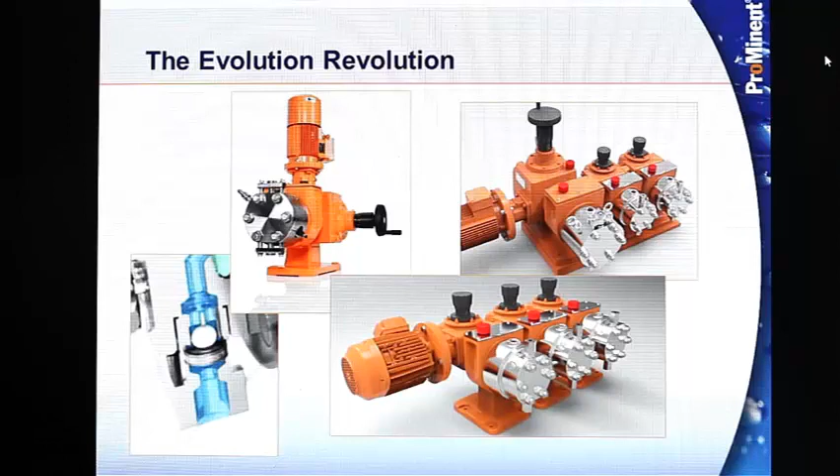So what is the Evolution Series pump? It's designed around the API 675 specification. API 675 is specific to chemical metering pumps, or positive displacement chemical dosing pumps. It is the American Petroleum Institute standard that everybody tends to build their pumps to, so it meets a high level of industrial standard.

It's one of those specifications that a lot of manufacturers will take some general basic exceptions to, but for the most part you've got a general guideline as to how you need to design that pump. We are compliant with the Evolution pump to the third edition, the most recent edition of API 675.

It is a hydraulically actuated diaphragm pump, meaning it has hydraulics driving the diaphragm, and consequently that pump can do extremely high pressures. It's capable of up to 5,800 psi, as you can see below. So it's capable of very high-end process type projects and applications.

It is a non-lost motion drive, which means it's a design that meets certain applications and standard specs for various clients, lending itself to the higher flow applications, becoming a very robust drive. These drives are not always the least expensive in the world. You won't find it in the very small pumps usually, but you'll see it in the higher end pumps where you need a much higher flow, much higher pressure applications.

The Evolution was designed to run in flow ranges starting at about 1 gallon an hour and up to 1,800 gallons an hour. It's able to do that through 4 frame sizes. Depending on the application, we can tailor in a single pump selection if we need to. Again, those pressures will go up to 5,800 psi in some of the lower flow applications for some of these services.

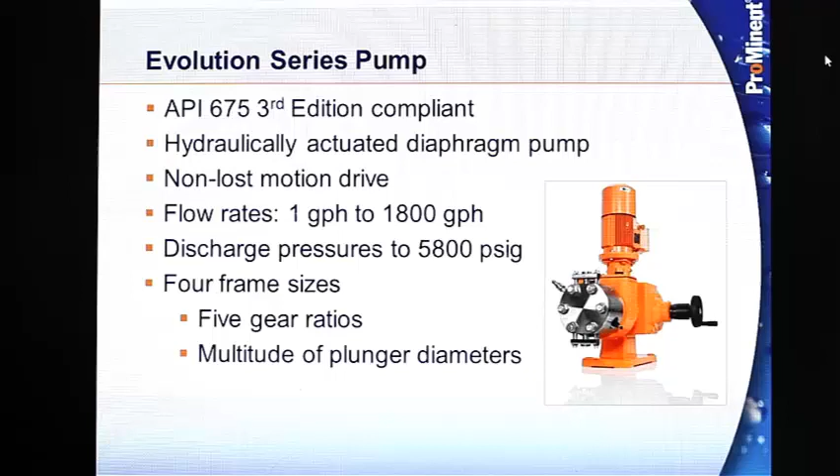The Evolution pump was designed to go after a broad spectrum of markets. Normally when we talk about API 675 pumps, American Petroleum Institute, we're thinking about chemical and petrochemical, hydrocarbon processing, the higher end process applications, which is exactly what this pump is designed for. What a lot of folks don't think about right off the top is other services this pump fits into, the power industry for example. The United States is currently replacing a lot of old coal-fired power plants, so there's a lot of new gas-fired plants being installed. Because of that, there's a lot of new applications, and those chemical feed applications can be relatively high pressure. So the Evolution fits into a lot of those services very well.

The oil and gas industry, even though it's not doing the best right now because of low oil prices, the business is still there. We know from past experience that the oil industry always has a cyclic effect. It will come back up at some point, and with this product you'll have a piece of equipment that fits it very well, including offshore applications for customers in the Gulf Coast, or anybody dealing with an engineering firm doing a project overseas for an offshore application.

The ones that don't always come to mind are water and wastewater treatment applications. Even municipal type plants periodically will specify a hydraulically actuated diaphragm pump. They don't usually need it for the pressure - most of those plants are 150 pounds discharge pressure at the most. But they have an engineer that has specified a product that says it needs to be a hydraulically actuated diaphragm pump. The Evolution fits those services very well. It's designed as a very robust pump, so it will be a very low maintenance product for them. Because it's designed for very high pressure applications, it's basically putting a very heavy duty pump into a very light duty service.

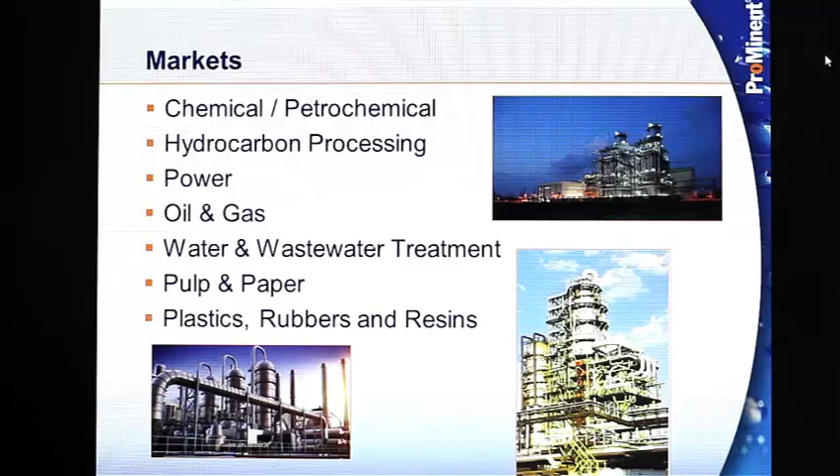Reviewing some of the design advantages that the Evolution has, high pressure is one of those things that comes to mind immediately. One of our bigger competitors, which probably has the largest population of chemical feed pumps in this range out in the world, tops out at about 3,500 pounds. So you've got immediately a product that can do higher pressure applications where they would have to step up into a much more expensive, much more complex drive mechanism to hit those high pressures. You're in a standard product, so you've got an ability to fit into those services much easier.

It uses the variable eccentric drive, a non-lost motion drive. It's a little more complex in the way it operates, but the net result is you get a very robust drive. These drives tend to run 15, 20 years without any maintenance other than changing oil. So they're very long life, very robust designs, and they'll give a very reliable product to most customers.

One of the features the Evolution has is it's always a double diaphragm with leak detection. That advantage sets you apart from some of the competition where they throw that in as an adder - that may be anywhere from $1,800 to $2,400 depending on the competition to put that into their pumps, where we have it as a standard option.

The leak detection option in the Evolution pump is done either via gauge, which is our standard offering, or you can add a pressure switch, either rated for regular environment or explosion-proof environment. So you've got a few options in there, and we can even upgrade that if a client has a very particular requirement for leak detection, if they want a special transmitter or something like that.

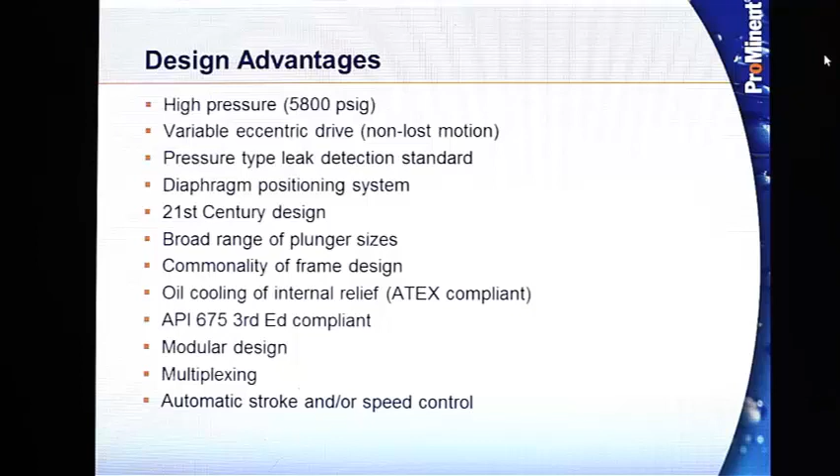I'm going to show you a couple quick videos. These will hopefully come through fairly clearly on the webinar. If not, these videos are available through the ProMinent website, or you can contact me and I can get you copies as well. They are currently shown using metric units in some cases, however we are working on an update that will show everything in US units. I'll do a little on-the-fly conversion for you guys so you can see how these pumps fit into some of the things you're looking at.

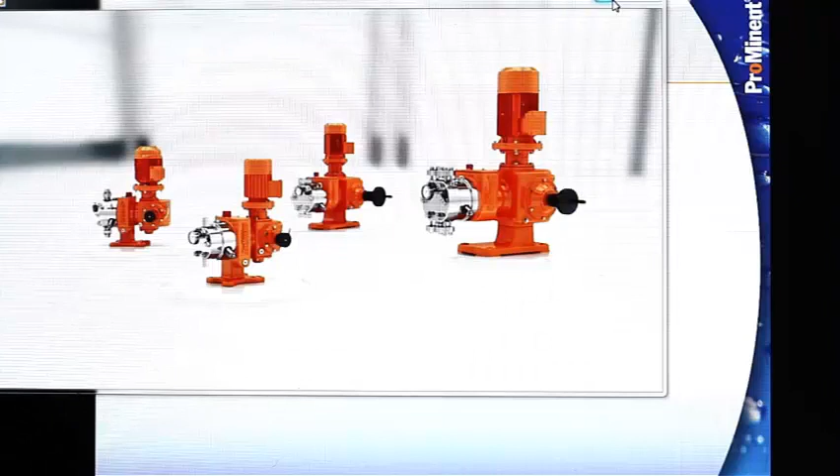So first off, we'll start with the Evolution pump family. So you see there's 4 frame sizes that we're looking at. Obviously, they all look very similar in the way that they're configured.

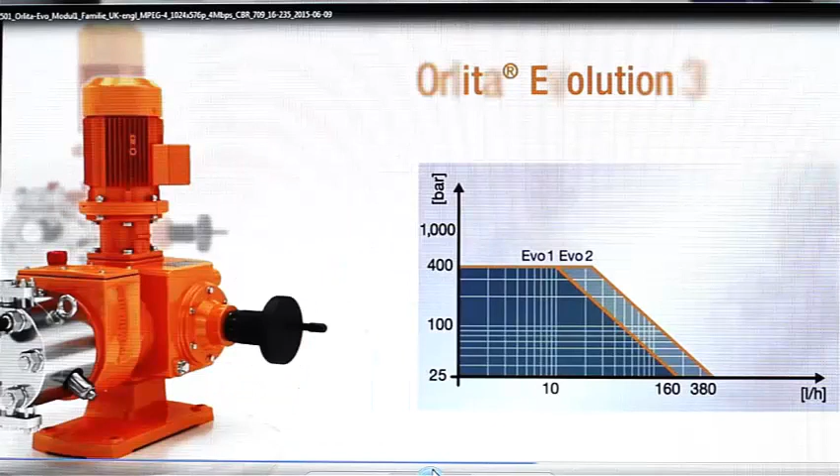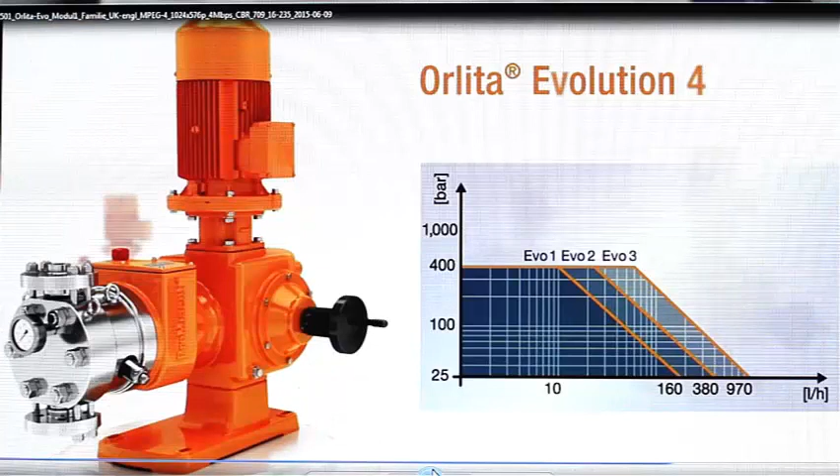Just so you understand, I mentioned earlier there's about an 1,800 gallon an hour max, and this pump can actually hit that flow, just at a little bit lower pressure. 3,000 liters an hour is 790 gallons an hour, but it will go up to about 1,800 on a couple other models. You'll see just in those 4 frames, you cover a broad spectrum in basically the same design.

Some of the design features.

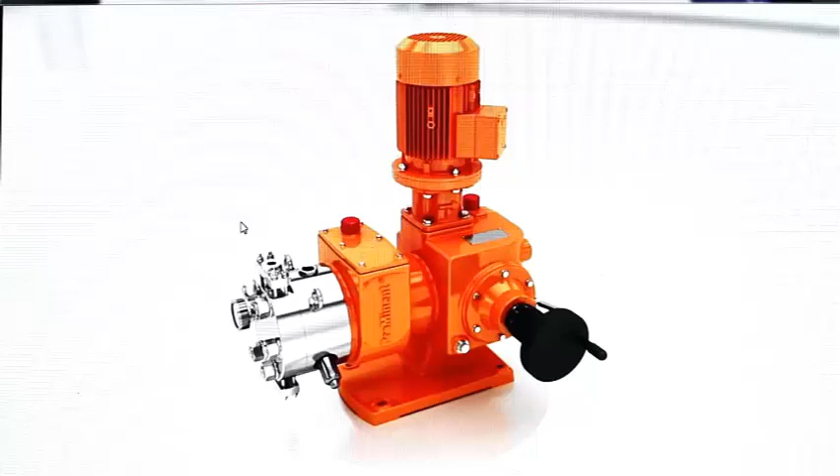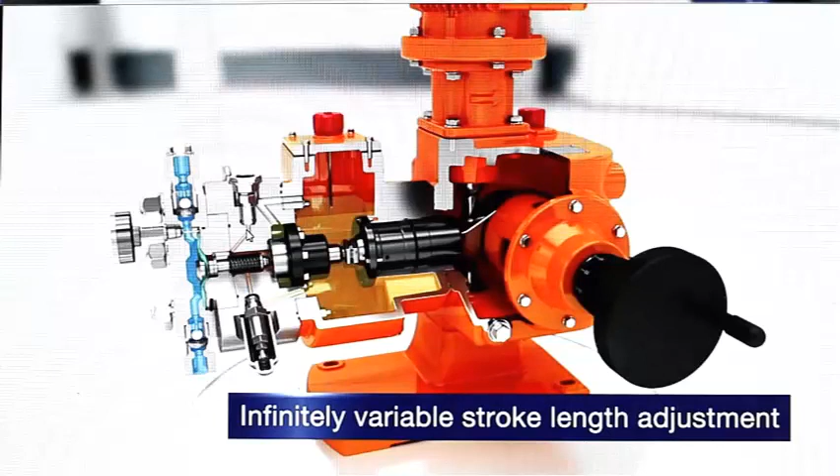So the first off is the variable eccentric. This allows the pump to adjust its stroke length without any major pulsation spikes. It's a very heavy-duty design, relatively simple to work with.

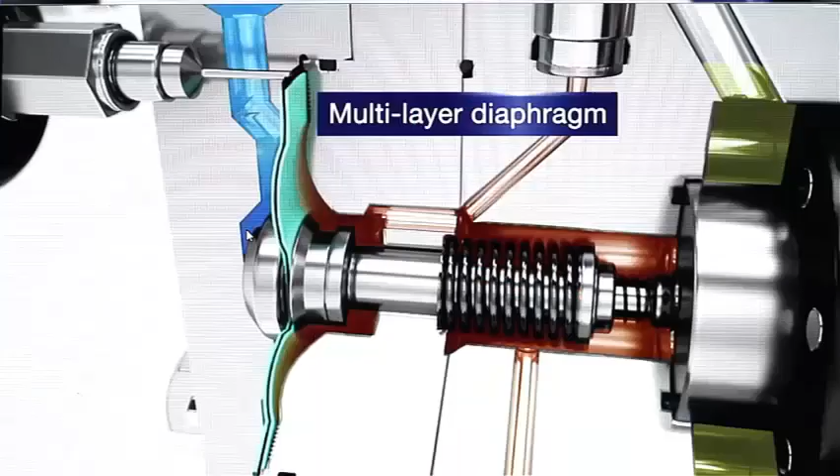Double diaphragm pump, automatic in every one of our models. It's not set as an option, it's actually a standard. The diaphragm position control helps make sure the diaphragm stays in a safe condition.

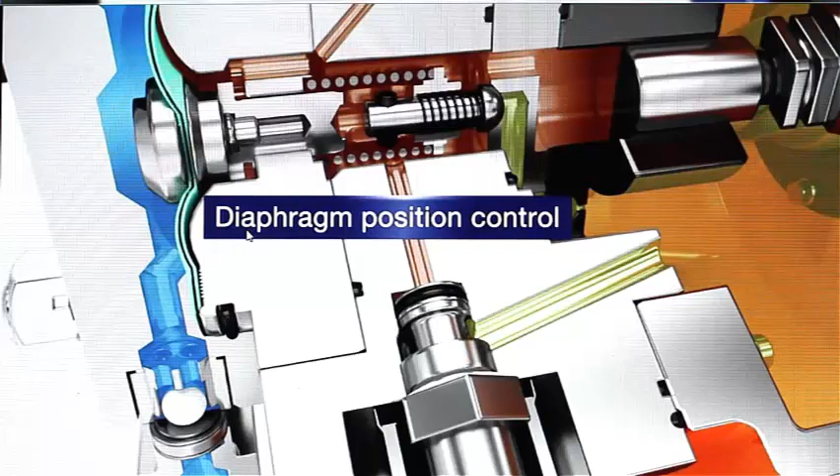Overpressure protection, and then leakage compensation for any hydraulic oil lost past the plunger or through the air bleed valve. Of course, air bleed for the hydraulics - when you deal with a hydraulic system, you have to be able to bleed air off of that system. All of these are integrated into the pump.

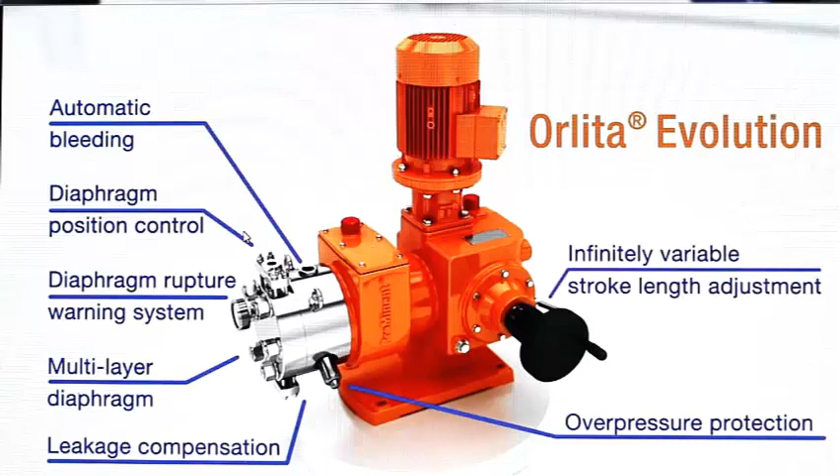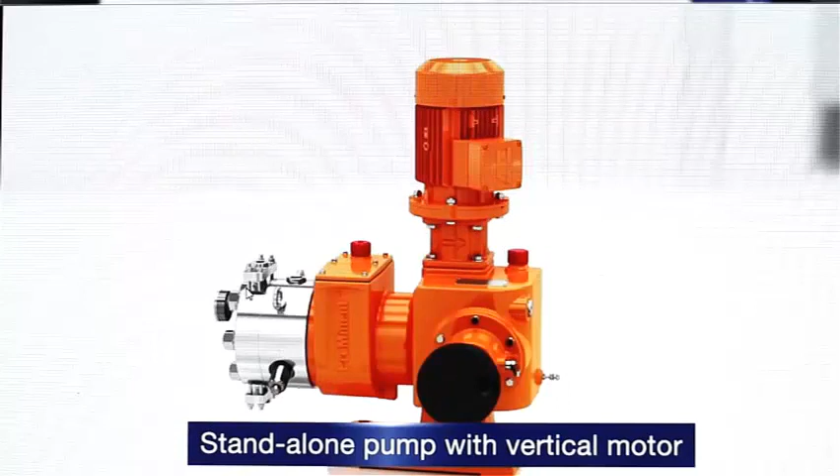And then the flexibility. The advantage of the way the Evolution was designed is you've got a lot of flexibility for being able to do different things with this pump. So if you want to multiplex it, you move the motor to the side, and then you can add additional drive cases. These can be different size drive cases as well - you can put a 4 with a 2 or 4 with a 1. So you've got a lot of flexibility on those, but it's basically been tailored to the different markets that you're going to run into.

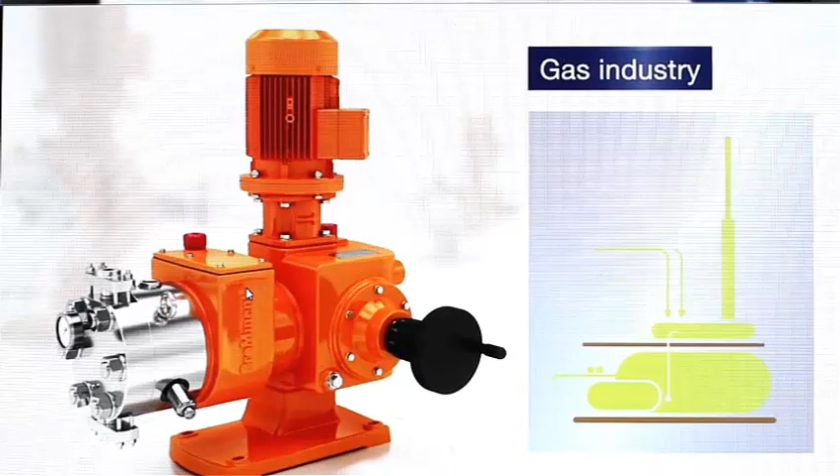Of course, the oil industry, gas operations, gas industries, chemical industry, and those other markets that we spoke about earlier.

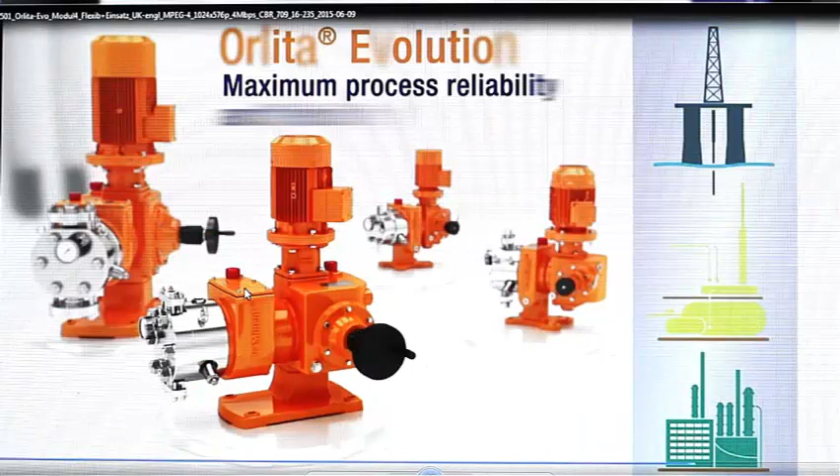So again, we're talking about a standardized product as opposed to the current Orlita product line, which is a much more engineered product for individual applications. This is a much more standard modular design. This will be manufactured in the USA - that's actually one of the biggest advantages that we're bringing to the table.

We're working on the plans for that now. The idea is we want to have that better delivery. We have to build that in the United States, and that's what we're working on now. It's one of the projects that I'm in the middle of right now.

It is a technically superior pump. It is much more modern technology. It's adding a lot more features to it without a lot more complexity to the pump. It gives you a lot more advantages. And ultimately, market competitive - it's going to be price competitive against all of those known players in the market today.